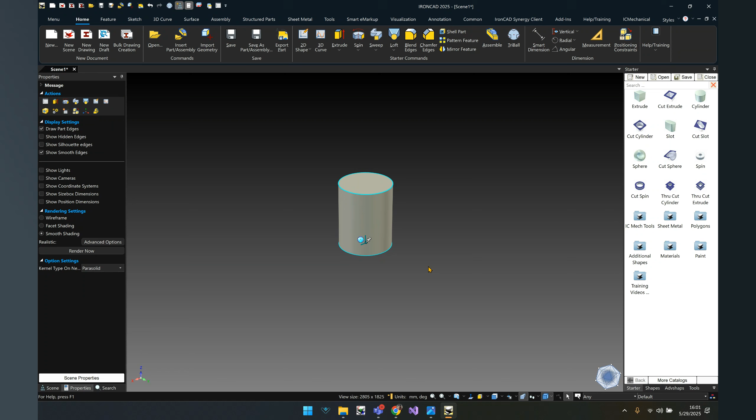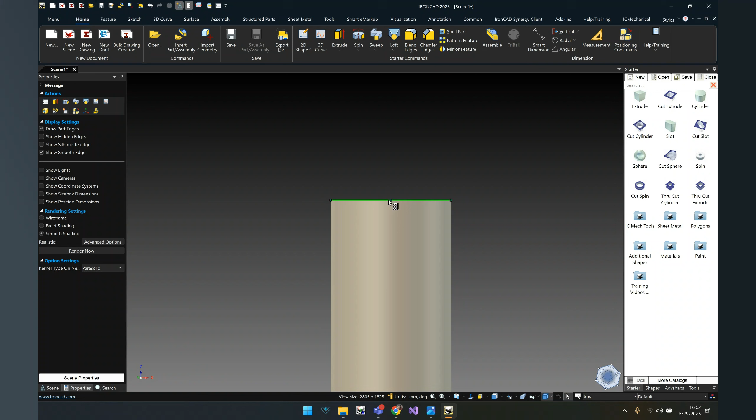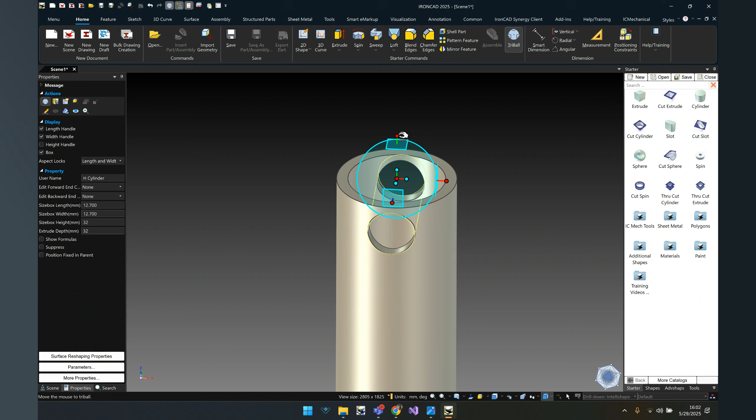Now we can add the bolt holes on the front face. We're going to hit the F key to get to the front and drag another through cut cylinder out onto this quadrant point. Except the bolt holes have to go across the top, so we're going to lock this axis, left click drag, 90 enter to get that cylinder all the way out to the top. We also know the center of these bolt holes are 8 down.

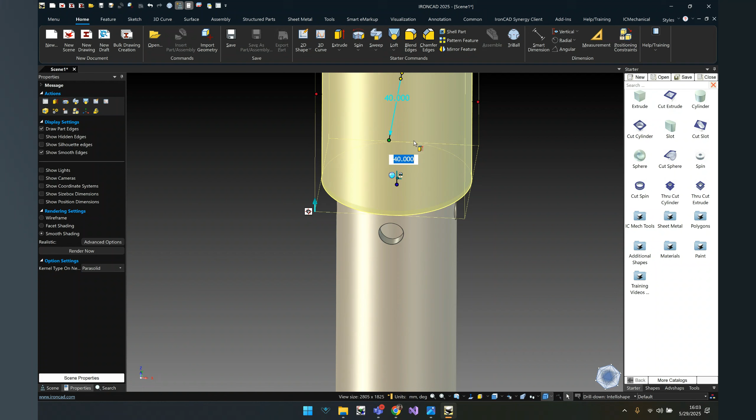We're going to hit spacebar to get our TriBall into positioning mode and shift snap to this edge to lock it into the center. Then we're going to right click drag link here, and we only need one of them at 90 degrees since it's a through cylinder. And since they're linked, when we set the diameters by clicking on one of these outside handles and set it to 6.6, they'll both change at the same time.

Now I'm going to shift left click drag a center so it snaps to the middle. And we're going to make those feet, which are 12 millimeter solid at 40 millimeter high.

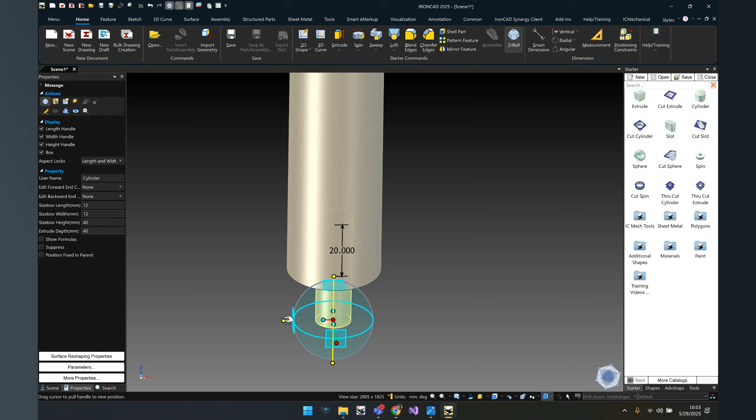Next, we're going to activate the TriBall and snap it down to the bottom of our central base. This is mainly because we know the foot is going to be 20 millimeters from the bottom. Then we know the center to center diameter is 408, so I'm going to left click drag out a radius of 204. Hit enter. Okay, now we have our foot.

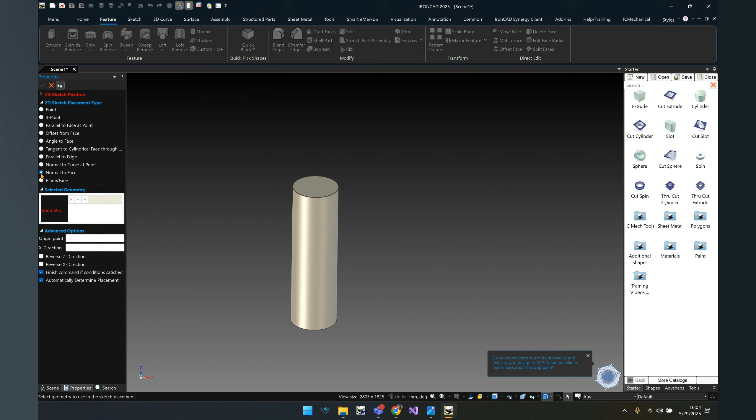So we're going to do a sweep now to get that sweeped edge all the way back to that center cylinder. Start our sweep command, choose the only part of the scene, and we're going to create that guide curve.

Shrinking the view so that all those grid lines are nice and symmetric. And we want it to be normal to this face.

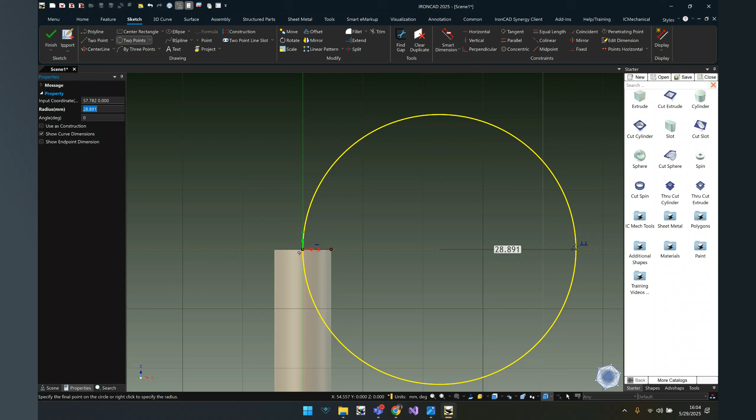All right, so we know that the inside radius of that sweep needs to be at 30 millimeters. So after creating that little construction point, we need to go from the center. And to get that inside of 30 millimeters, we're going to right click and do a central radius of 36, because that's the radius of our foot.

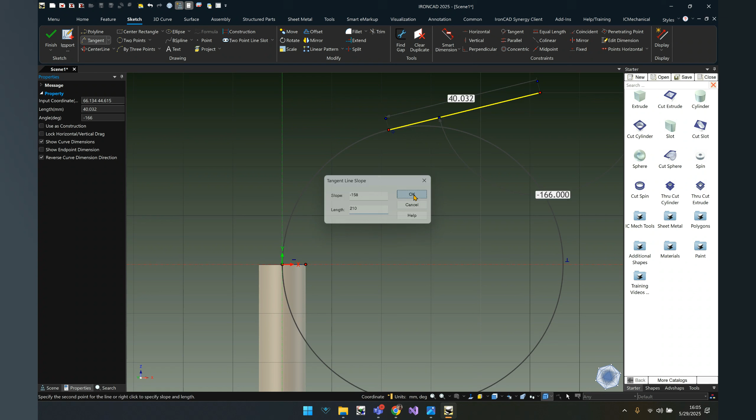Okay, now we just need to do a tangent line, left clicking on the circle, and right clicking out anywhere in space. We're going to set our angle to be 22 degrees, doing the subtraction just because we're upside down. And we know we're going to be somewhere around 210 millimeters towards the middle of the base, just because we're close to that 204 on the bottom.

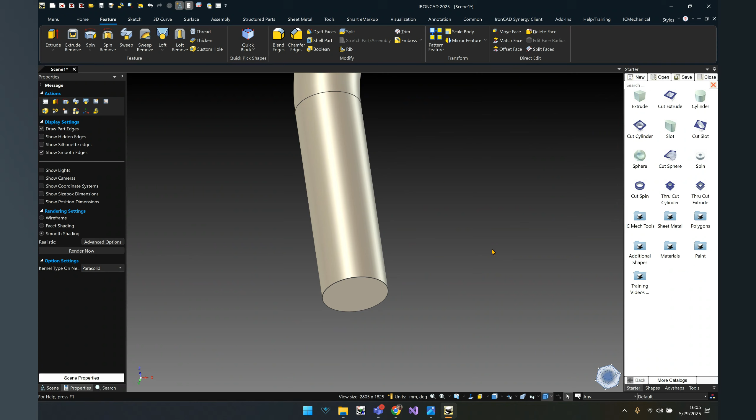Hit OK. Now we're just going to trim off this outside excess and hit finish. Once that's done, all we have to do is select our top face because it's the same diameter and finish out the sweep. Bam. Nice sweep out that way.

Okay, now we're going to set up the foot for later, but we're going to drag out our foot cylinder to this center point. And we know that this one is actually 6 millimeters solid.

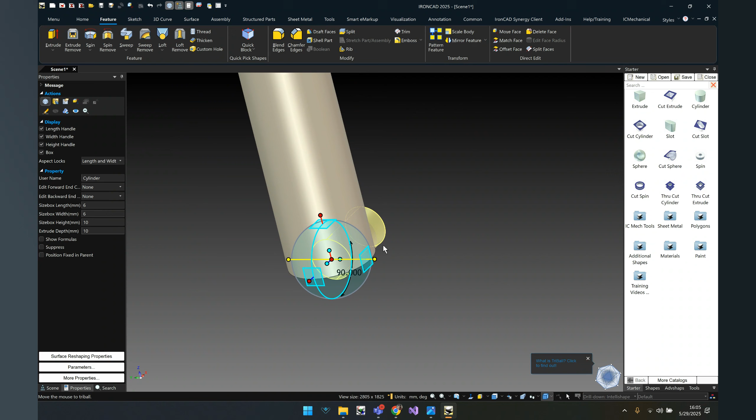And then we also know that it's going to be angled towards the center as well. So we're going to turn on the TriBall, left click drag 90 degrees. And then we also know that this bottom support is 15 millimeters from the bottom of this cylinder to the bottom of the foot. We have a 6 millimeter diameter base, so that means we need to drag up 18 millimeters. Now we're 15 from the bottom, edge to edge.

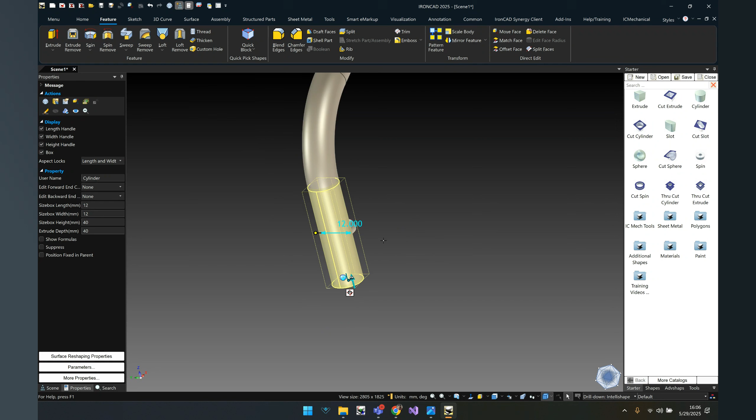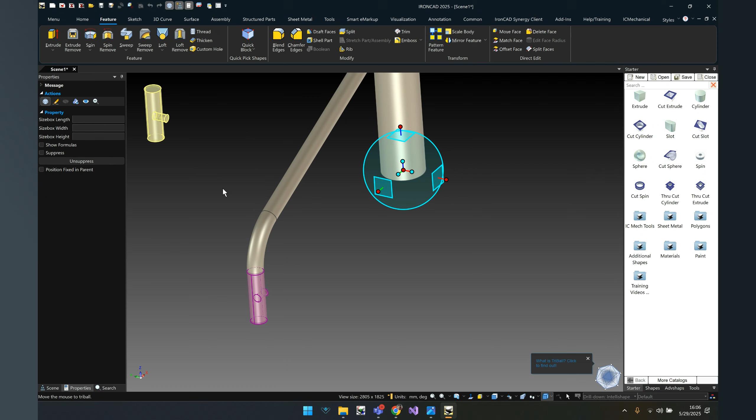Okay, we're going to set that angle a little bit later. What we're going to do now is shift select both of these features by clicking Alt and then holding Shift to get both. Then we're going to turn on the TriBall, hit spacebar to move it into positioning mode, and shift drag to this edge to snap it in place, holding Shift instead of Control. Now that we have both of these, we're going to right click drag and link copy here, once again 90.

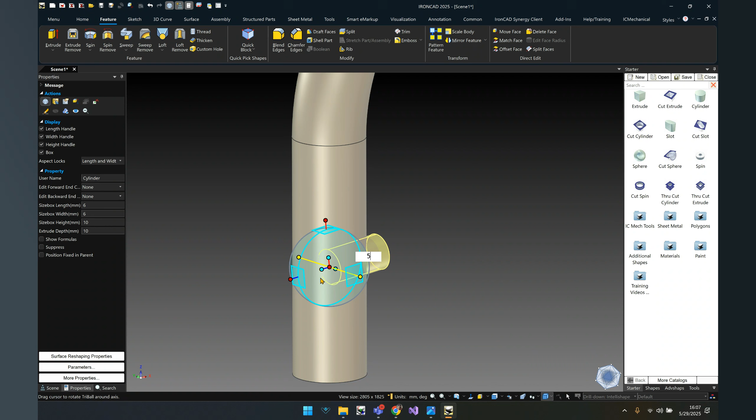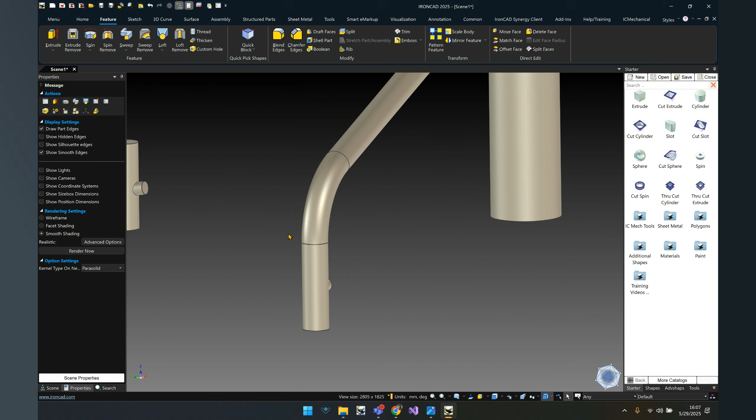Now what we need to do is set the angles of our two feet by turning on the TriBall once again. We know this is going to be the long side, the tall side support, so this angle is 5 degrees. And we know that this angle over here, clicking Alt, is going to be at 8 degrees, going up 8 degrees. Got that on the same part almost both times.

Since those were linked, when we drag these shapes to the center to change their length, they both will update and go straight through. I'm going to hit my left side view here, make sure I'm not sticking out the other way, and we're good to go. Now I just have to do the support sweep for this left face.

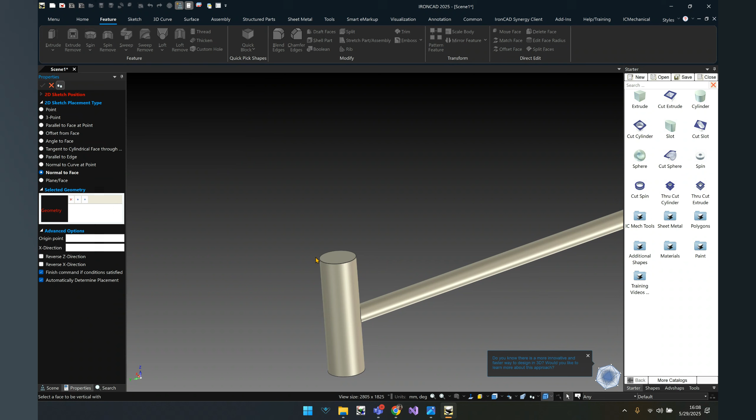So I'm going to start my sweep command again, click on my part, and add another guide curve. This time, when I choose normal to the face, IronCAD's going to try to remember that original plane we made at the beginning, because normally you're making all these sketches on the same side when doing them back to back. But in this case, let's say I needed it to face towards the middle.

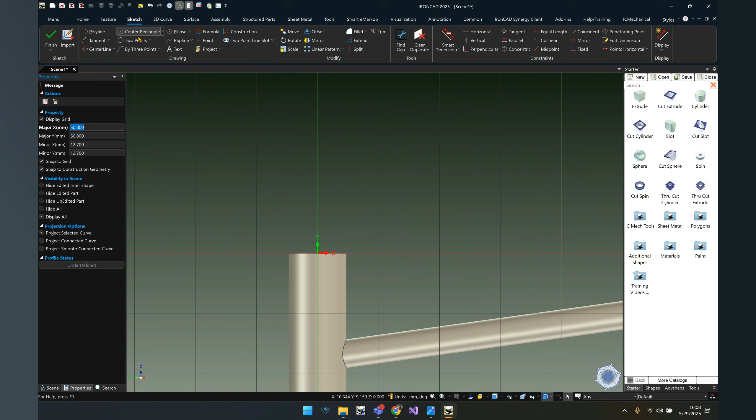That's okay. So once again, I can activate my TriBall and just rotate that around 90 degrees and hit F7 to snap to this front edge face. Now I can just do the same thing I did last time, giving myself a quick little construction curve, and then adding a 2-point center radius by right-clicking to finish and typing in 36.

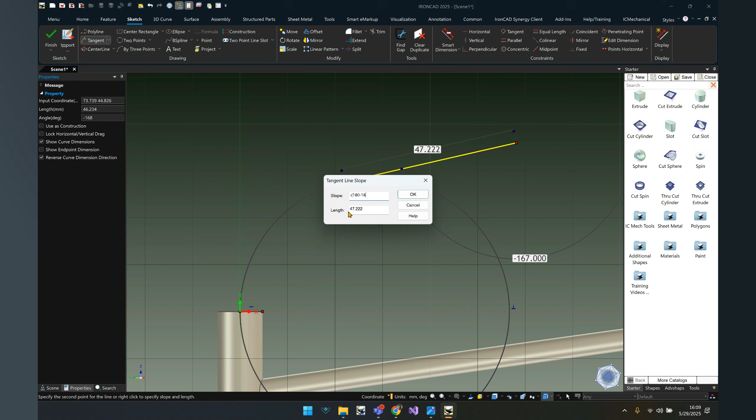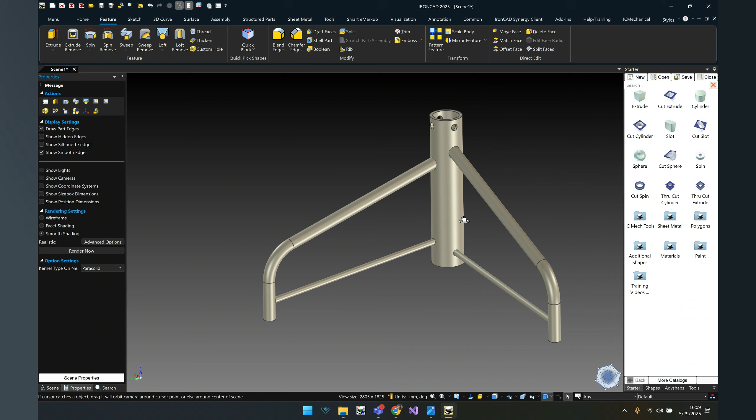Except this time our tangent line is at 18 degrees because this is the short side. Right-clicking out in space, doing my upside down math at 180 minus 18. And we know this one's about 200 millimeters to the center again. Going to trim this off, hit finish, and once again choose our top sweep tab. Hit our top sweep at the section right there of the top of our foot. Boom.

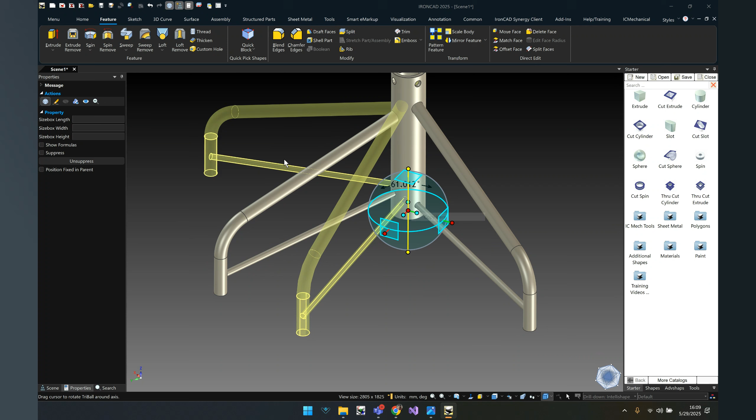Now we have both of these feet that are going in and we just need to copy them. So I'm going to click Alt and hold Shift, and select all the features I want to copy, which is both of these legs. Activate my TriBall, and just to make sure, I'm going to snap it back to this center, which it already was there, luckily. Now I'm just going to right-click, drag, and let go, copy here, 180 degrees this time because it's both feet, and we get our copy, nice and fast.

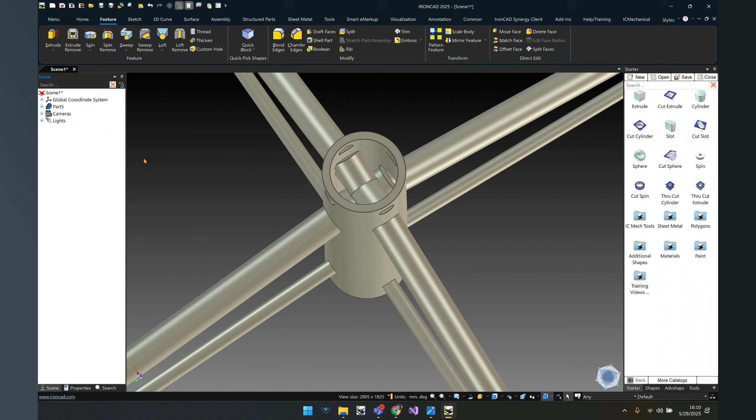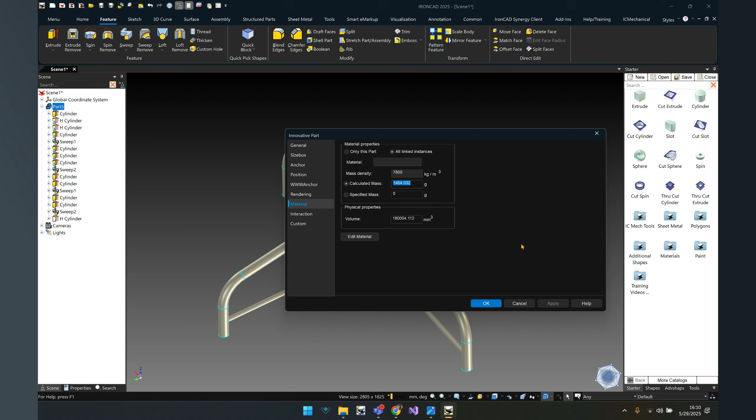Now we would almost be done, but something we did is since we started with the center, all of these feet and supports stick straight through the center of our main tree support, which is not supposed to happen. But this is an easy fix, because we can go to our scene browser, highlight that original H cylinder, and just change the order that it was made all the way down to the bottom, and it will cut through everybody. Now our tree stand is done, looks all nice.

So we're going to right click, go to Part Properties, go to that material, and you'll see that we have the correct mass of 1404.